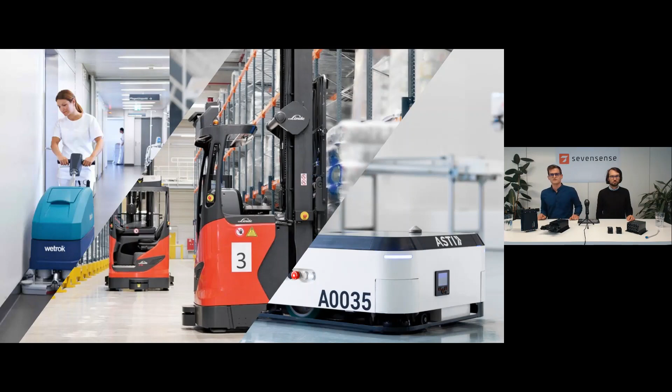Nonetheless, today the challenges for mobile robotics are elsewhere, in professional cleaning or in material handling, whether in warehouses or on the production floor. There are several challenges that need to be tackled, and VisualSLAM can help. But what is VisualSLAM? You might have heard several times already about SLAM. SLAM is simultaneous localization and mapping. This is a technique used by mobile robots to understand where they are positioned when operating. In particular, robots need to map the environment and then find their position within this map, which will then be used to decide where to go.

Basically, visual inertial SLAM is a concept inspired by how humans actually work and how people understand where they are in their environment. Specifically, people use both their eyes and the sense of equilibrium that lies in their ears to understand how they are positioned in their surroundings. Similarly, a robot can use image sensors or cameras and the motion sensors embedded on the vehicle to collect the same information.

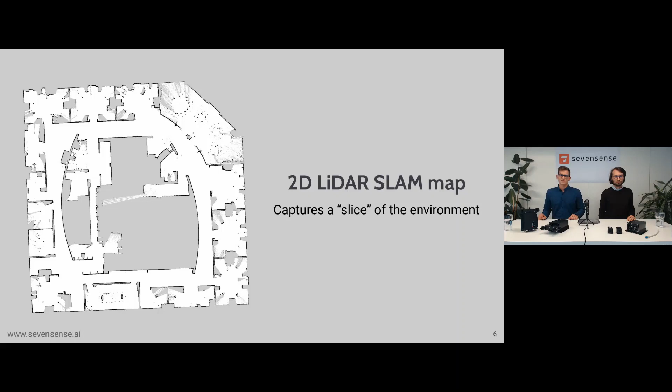Literally, it took 20 years of worldwide research in VisualSLAM to develop such a system. Now you may wonder, what is the difference with the image we have seen before? We have seen that 2D LiDAR SLAM detects a single slice. With 3D SLAM, we capture the entire thing, a lot of information that can be used for several purposes. And specifically now, you may ask, why do we actually need VisualSLAM?

In fact, there are several applications nowadays that are working perfectly, and they constitute the state of the art in the material handling industry. If we look, for instance, at line supply and kitting, line following is doing a great job there. It is as accurate as it needs to be. It handles the dynamic environment. On the other hand, the setup cost of such a system is very high, and it takes time and labor to install all the lines. And the layouts generated during the installation are definitely not flexible.

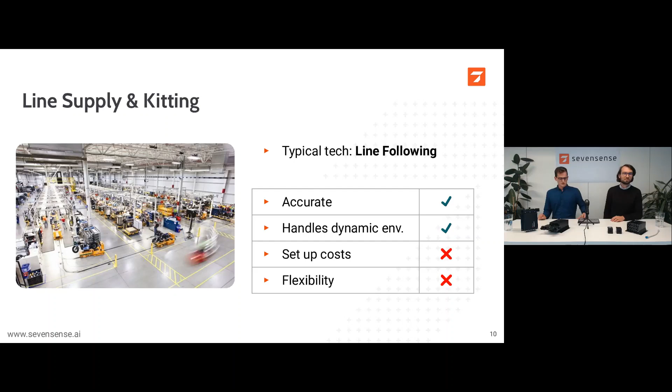In another case that constitutes state-of-the-art techniques in automated material handling, we have end-of-line handling, for instance, where large pallet trucks are transporting goods from the end of a line to, let's say, a storage. And again, to pick up a pallet, you need to be accurate. And that's what laser triangulation is very good at. It's very accurate. You can also handle dynamic environments.

Since laser triangulation works with reflectors at height, it means that anything happening below the line of sight of the LiDAR doesn't affect at all the navigation capability of the vehicle. On the other hand, the setup cost in this case is also very high. It takes a lot of time to install, to calibrate the entire system, to define the map and the layout of the system, as well as the reflectors that need to be installed all over the operating

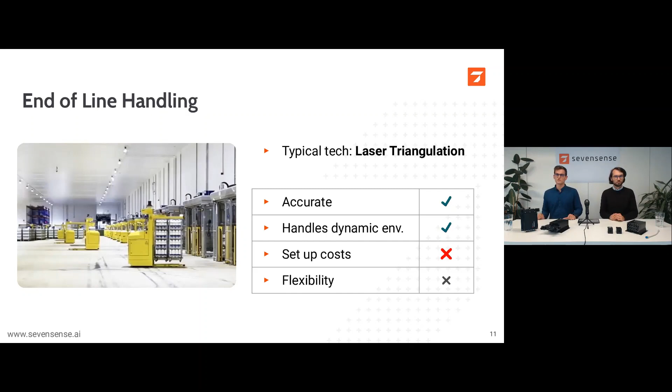environment. Regarding flexibility, it is definitely higher than the previous case, but at the same time, you might need to add more reflectors. You might need to add more features in your map in case you want to move beyond the area that you have been using so far.

Next, we have another process, inter-process connection, where the most advanced laser SLAM technology based on natural features is widely used. Why is it a really good solution? Because it is accurate, the setup cost is very low, and it is very quick and easy to install. And at the same time, you do not rely on a specific path or predefined line, so it is flexible to adapt.

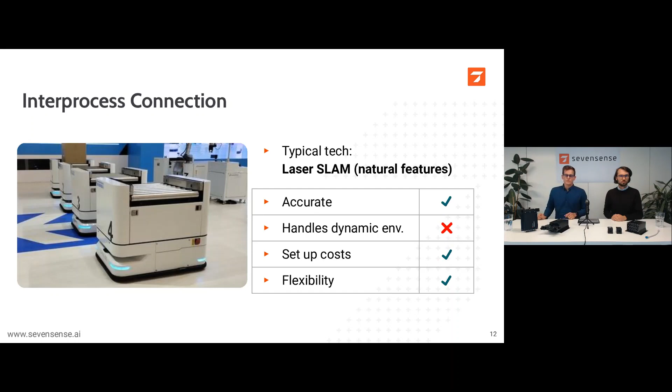But at the same time, you have seen what 2D LiDAR SLAM relies on, this map, this blueprint. What if anything changes in this blueprint? Then the robot may get confused. This means that dynamic environments are not the best place for such a technology. So we have seen complementary characteristics for all these different technologies. But can we have it all?

There are several applications out there that are still manual and cannot be automated because of the limitations of the existing technologies that we have seen. Accuracy below 1 centimeter, the possibility to handle dynamic environments, low cost for the setup, and especially high flexibility. This is extremely important in warehousing activity as well as in modular production processes.

So with Sevensense VisualSLAM, we are actually bringing all the key benefits that would enable a solution that covers all the aspects that we have seen so far. But there is something more to this, because, as we said, with VisualSLAM we enable a third dimension. And this third dimension brings along other benefits, especially regarding robustness.

Since we can detect the structure and the environment on the entire 3D surface, we are resistant to occlusions, potentially in some directions of the vehicle. So if you need to pick up, for instance, a pallet, and we have a vehicle passing beneath it, we will not be bothered at all if there are any wheels or any other occlusions obstructing the viewpoint of the cameras.

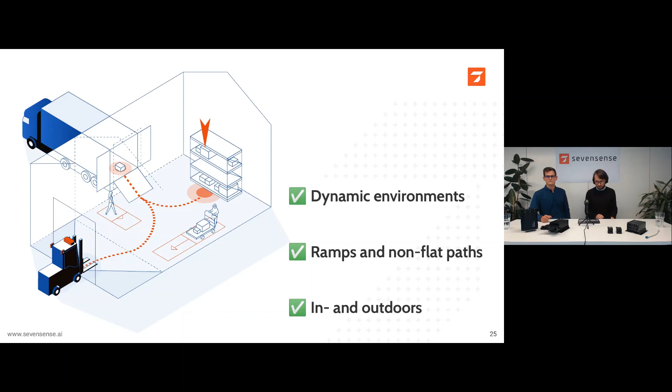So we would like to invite you to say hi to Alphasense Position. So it's a VisualSLAM product from Sevensense that includes all this VisualSLAM technology in a box. And that's why we think about it as a VisualSLAM in a box system. So basically a complete package, which includes both hardware and software to bring you this VisualSLAM experience and these VisualSLAM benefits directly to your robot.

Let's think about specifications. So that all sounds great if we talk about concepts, but what does it actually bring? So first of all, the system brings excellent repeatability, and this has been confirmed already by our customers during various evaluations. We have measured 4 millimeter mean precision error of the system, which makes it possible to navigate very precisely, but also to dock or charge at some stations.

It brings global localization without any prior, something that Gianluca already mentioned, which permits to start operations anywhere in the map. So you don't need to read any tags, you don't need to read any beacons, but you can basically drop the robot anywhere in the map and start operating. What is important here, it's basically also called a kidnapped robot problem, which makes it really easy to just reset or start the robot anywhere after, for example, a failure.

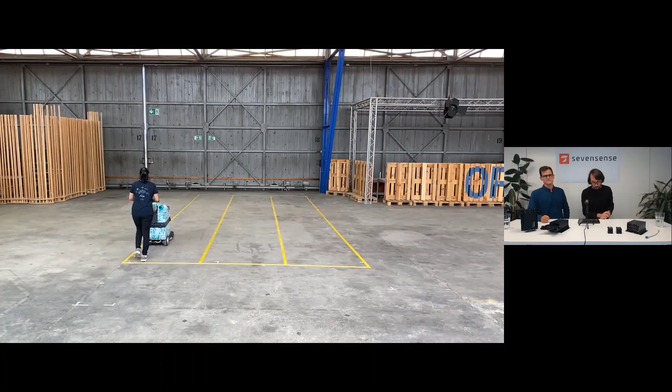Our user can use a web-based interface to start mapping. It's an interface that we ship with our evaluation kit, but obviously it can also be done programmatically over an API. Our user can basically move the machine manually or using a joystick through the environment to record visual information about this environment.

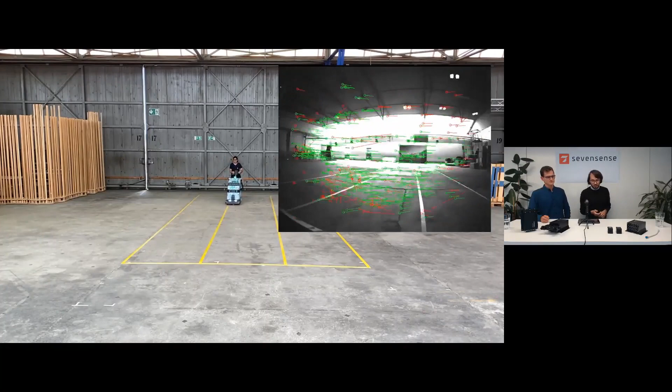And you can see that using the cameras, the features are tracked in green, those circles in green in the environment, and then a 3D visual map is created, which is represented by the yellow rays in the map. And you can also see that the map is emerging.

Now, our user is finishing this mapping process, and this autonomous post-processing step will happen, so no user intervention. The map will be refined, so you can see that the geometry is slightly adapted to become more precise. And what we end up with is like a 3D map of the environment that is literally ready to use.

So that's how the deployment process looks like. And you can see that it's very seamless, meaning no expert knowledge and no manual cleaning up the map is necessary. It's enough to travel through the environment.

Next, we would like to move to map sharing. So you can ask, okay, it's really easy to deploy the robot, but how can I take this from a single robot to a fleet of robots? So here we are showing like a structure of a system where we have robot, which is basically Edge AI, equipped with Alphasense Position, which can generate maps, but it can also get maps from a server. And using those maps, it can perform the localization process.

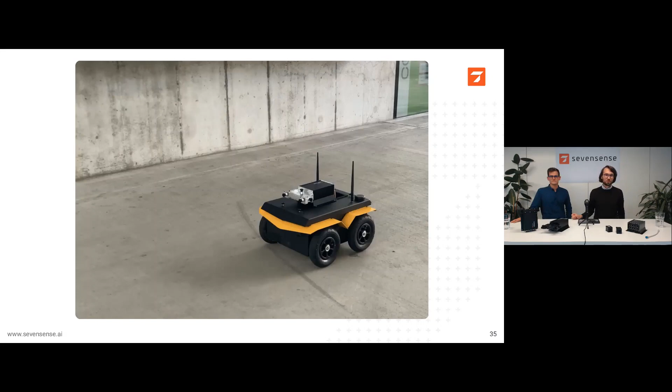You can manage the device, so you can change the configuration, you can change the calibration, you can also manage the software versions or simply shut down the device. And finally, you can also take a look at the notifications coming from our device, so you can check what's going on, if anything was reported, if you can somehow optimize or improve the way Alphasense Position is working. So this is particularly important during this initial integration and evaluation, where it's very important and very efficient to have a very good insight into the unit.

So now I would like to sum up how Alphasense Position and VisualSLAM are working. So Alphasense Position works both indoors and outdoors, meaning we are ready to do industrial logistics and material handling applications indoors, but also outdoors. We support dynamic and large spaces, so even if the spaces are vast or are changing super quickly, that's not a problem for VisualSLAM.

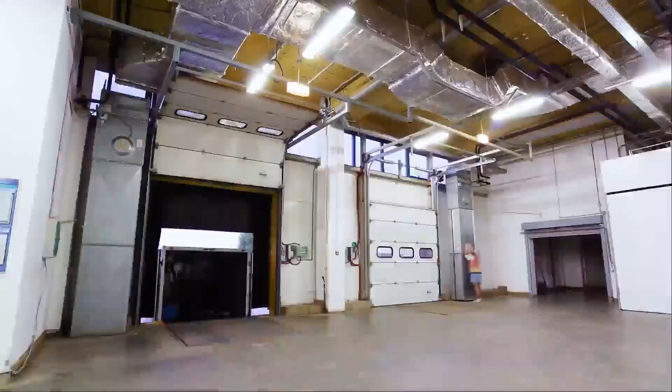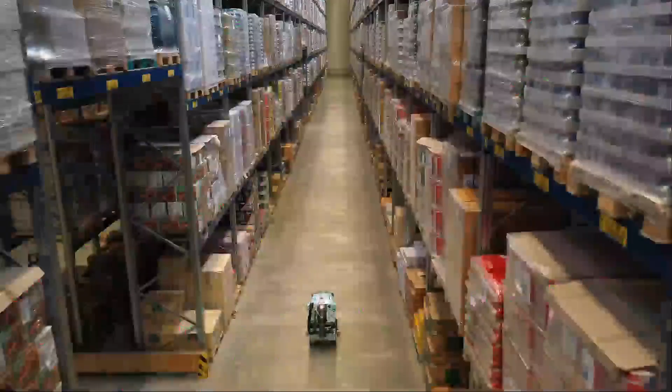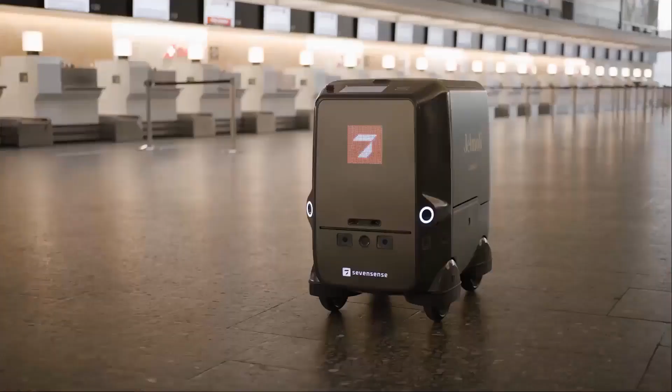Positioning is a fundamental skill that makes autonomous mobile robots reliable. However, current positioning technology is not flexible and robust enough for what the industry needs. These limitations are overcome by 3D VisualSLAM. We used cutting-edge VisualSLAM technology to build Alphasense Position, the most advanced positioning solution for robotics OEMs. Mounted on mobile robots, it allows them to always know where they are, precisely and reliably, even in the toughest environments. With Alphasense Position, navigation outdoors, as well as in dynamic, repetitive, or large environments, is not a challenge anymore.

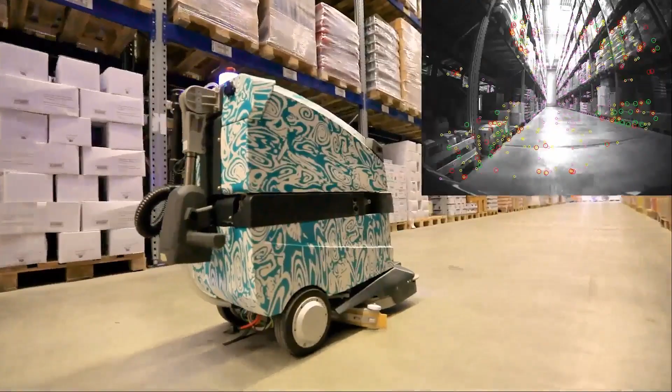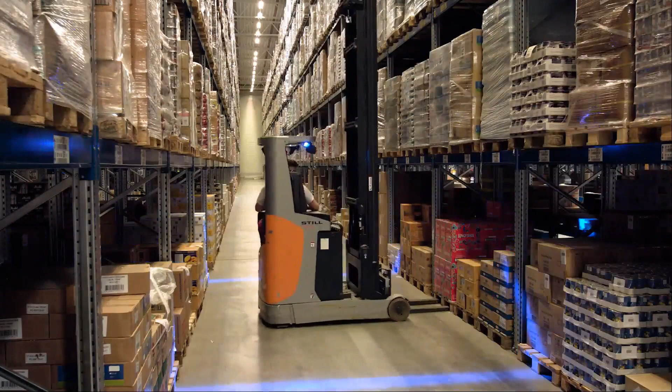Creating maps is easy and fast. It requires no external infrastructure nor expertise and minimizes deployment downtimes. This gives high flexibility in defining the setup and keeps installation costs low. The system never stops learning. It keeps updating the map so that it can work in environments that change over time. The updated maps can even be shared across a fleet of robots.

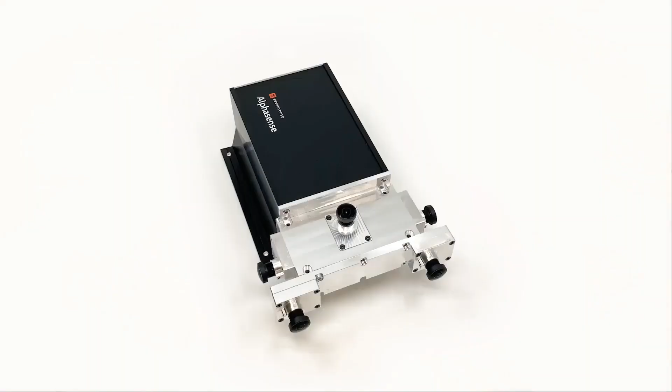Alphasense Position combines sensor fusion AI with our multi-camera solution. Up to 8 cameras can be installed anywhere on the robot to fit the target application and provide a full surround view. It is also available as an evaluation kit to accelerate the development of new robotic vehicles. To overcome your localization challenges in tough environments, Alphasense Position brings VisualSLAM to your robots, making them smarter than ever before.

So, thank you, Martin, for introducing Alphasense Position. It's really a great product, and the VisualSLAM that we have seen in action in the video is actually running on several robots. We have been testing it a lot for many, many hours, both with the most advanced research institutes based in Zurich and elsewhere in the world, and with industrial partners. So we have our system well developed. Sorry, I need to get to the right slide.

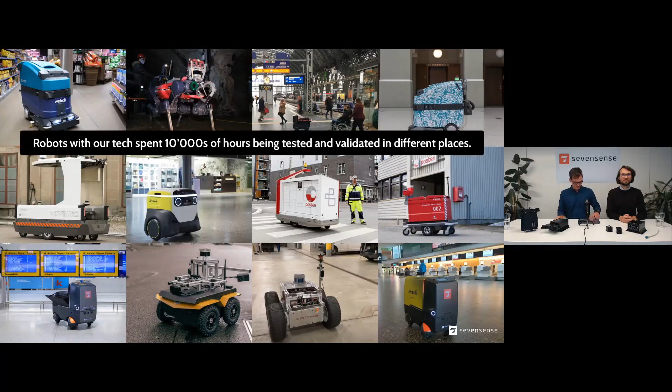Okay, as I said at the beginning, we are really focusing on material handling vehicles and professional cleaning vehicles. These are the two main industries where we see the strongest potential for Alphasense Position and Sevensense VisualSLAM. In particular, we have already been working with the top international players in the material handling field, in Europe, Japan and USA. We cannot disclose them yet, but this is an exciting journey for us, and we are looking forward to seeing this deployed in the real world very soon.

And with this, we are wrapping up our presentation, and we are ready to take some questions.